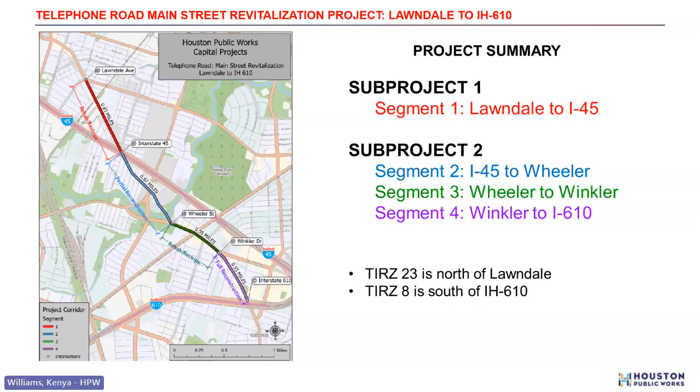Like Kenya said, this project actually has 4 segments. Today we are going to be focusing on segment 1, which goes from Lawndale to I-45. You'll hear about this as Subproject 1, and that's what we're going to talk about tonight. There's another presentation and opportunity for you all to see what Subproject 2 is all about, which is segments 2, 3, and 4. But Subproject 1...

Just to quickly cross-check on where we are, this project goes from Lawndale to I-45, and we do have a railroad crossing within the study limits south of Lombardy. We also have a very important stakeholder. Everybody's important, but we also have a school, which is a combination of elementary, middle, and high school, a private school, just south of the railroad crossing. We will talk about some operations at Gate 2 in the presentation in a few minutes.

The south segment is at the I-45 frontage road, and that particular intersection is owned by TxDOT. We're coordinating with them on whatever improvements need to happen at that intersection.

As you all know, when we get into a project, we like to get an assessment of the base conditions. For this segment, we know it carries 10,000 AADT, average annual daily traffic for both directions combined. We did notice some high speed happening on this section of roadway. Remember, not every single element is going to be addressed, but we've done everything we can to make this a better, safer, and enhanced mobility project.

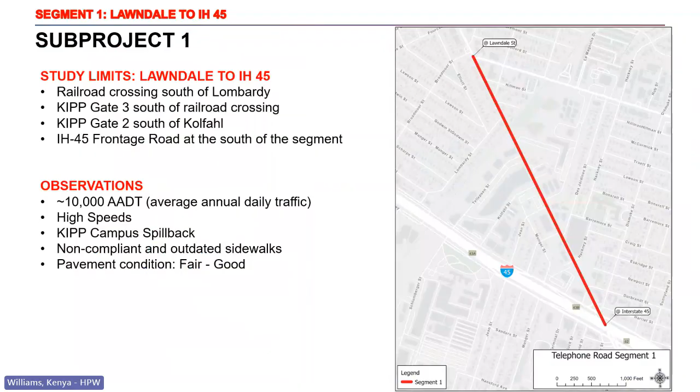In terms of the overall benefits for the project, when we're said and done, you'll have improved sidewalks, upgraded pedestrian crossings at key locations, optimized traffic signals, optimized bus stop locations, and smooth roadway transitions with clear signage at the railroad crossing. On top of that, we've done an effective evaluation to understand what drainage mitigation improvements need to be completed for this segment.

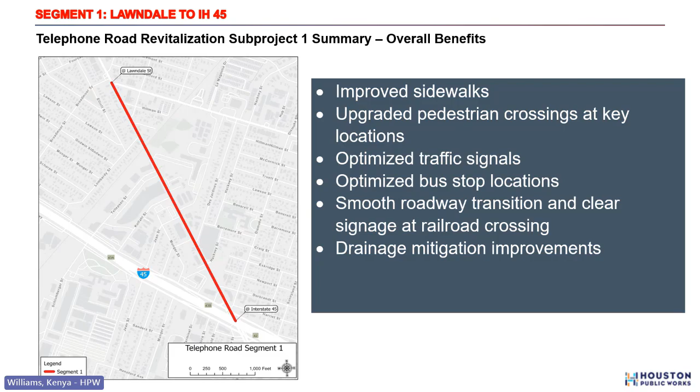As part of the field investigation, most of you know what's out there today.

From a pavement perspective, we observed some cracked pavements and cracked curbs and gutters. From a sidewalk perspective, we saw curb ramp damages, cracked lane sections, and cracked sidewalks. Looking at drainage issues, there were some depressed sidewalk panels and ponding issues. That's why we're here today, to make an honest, effective effort to fix most, if not all, of these challenges for y'all.

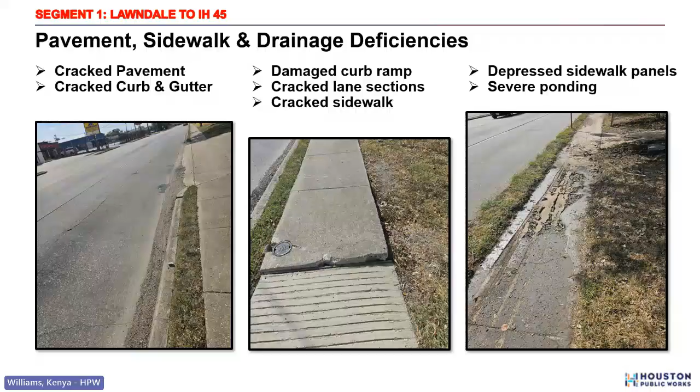We did identify for this section of roadway that we look at the latest 5 years worth of crash data, vetted and approved by TxDOT and City of Houston. According to that, we observed 71 crashes within the limits of segment 1. Unfortunately there was one fatal crash, and we also had some suspected serious injuries and possible injury crashes in the segment.

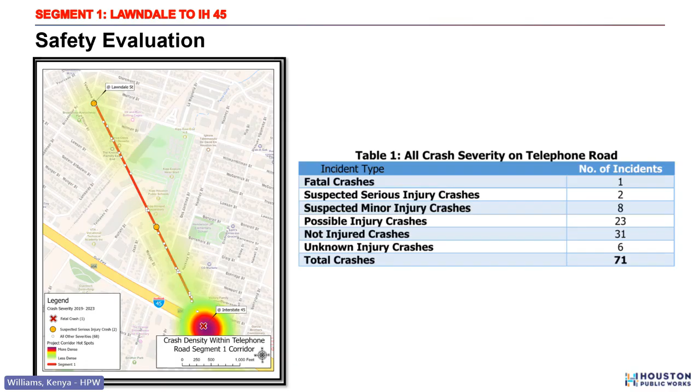The big blob you see at I-45 relates to the volume carried at the frontage road, and typically as exposure goes up, your crash rate goes up as well. That's why you see higher density there than the rest of the corridor at the I-45 interchange.

To quickly give you a highlight and breakout of what's entailed in this project, we'll walk through several different elements of improvements we're going to be doing for you, starting with the roadway improvements.

As part of this project and design, we're going to do pavement rehab and restriping throughout the corridor, which will improve ride quality and extend pavement life. We're also going to do localized concrete panel replacements where needed, and for sections where panels are good enough, we'll be doing crack sealing as well. When all is said and done, all pavement markings will have been updated and refreshed.

Bringing them all up to the current standards. We're also going to maintain the same number of general mobility lanes that are out there today. We will talk about how that's going to look like in the proposed improvements in a second. We're also going to improve surface condition, upgrade signage, and address the railroad crossing with enhanced safety and visibility, plus some minor intersection safety improvements.

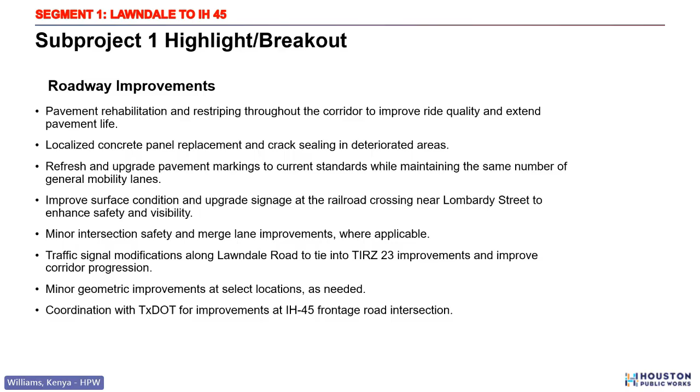The Lawndale Road signal is pretty much the only signal within the city jurisdiction that's going to be part of this segment. The majority of improvements on that signal will be handled by what we call a TIRZ 23 improvement project, which is part of the overall progression on the north and south side of this project's limits. We'll also be doing minor geometric improvements, and most importantly, at the I-45 frontage road intersection, we'll be coordinating with TxDOT for any improvements needed.

In terms of pedestrian facility improvements, this is the most exciting slide in my opinion, because we're going to give you significantly enhanced pedestrian facilities, reconstructing sidewalks to 5 feet where possible. In front of the KIPP school, we're actually extending it to about 7 feet. We're also going to be doing new curb ramps and detectable warning surfaces at intersections.

We're also going to be enhancing the mid-block crossing at KIPP Gate 2 — we'll talk about the details in a second. Every single crosswalk you touch is going to be a high visibility crosswalk with better treatments to enhance pedestrian safety. And of course, we're also going to be doing pedestrian safety and connectivity improvements at the railroad crossing. We've been having ongoing discussions with Union Pacific on that.

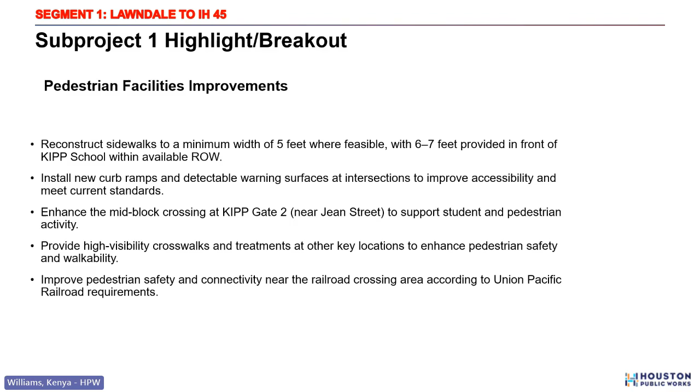Next slide, please. And we've also been coordinating with Metro. Go to the next slide, Kenya.

We also did an evaluation on the illumination for this segment. Right now there are no cold spots, as we call them. So for any existing lighting components, in order to maintain enhanced illumination levels for your safety, we're going to be doing in-kind replacement of the existing lighting.

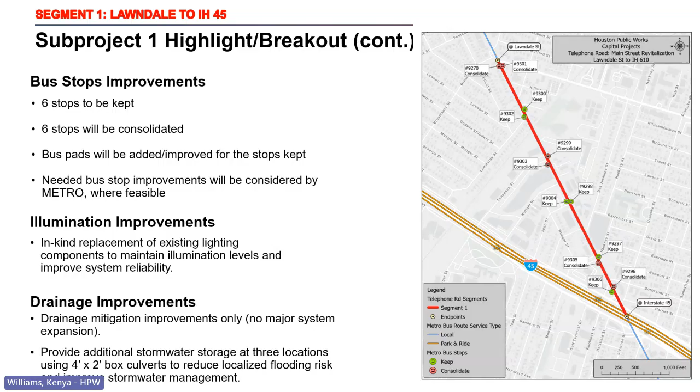Like I said earlier, we've done an extensive drainage study for this segment to understand what we need to do. Good news — we don't have to do any major system expansion. However, we did identify 3 locations where we have to install box culverts. We're going to be doing 4x2 box culverts at those 3 locations, which will reduce some localized flooding we talked about earlier and improve stormwater management for you guys.

All right, I'm going to quickly walk you through how this is going to look when the project is all done, just to give you a visual representation. So when all said and done, the general mobility lanes are going to be maintained, and a mid-block crossing is under evaluation at McCormick Street. The city is reviewing to see if we can install a new one — if we do, we will.

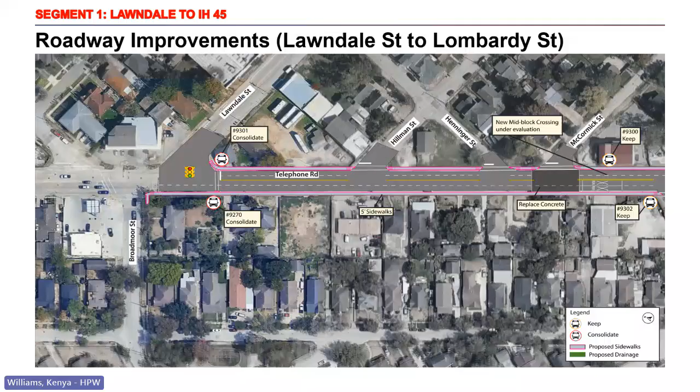Like I said, we're going to be replacing concrete panels where we have to. And you'll see that some bus stops that need to be consolidated will be consolidated, and the ones we're going to keep will be improved. Next slide, please. And as you go past the railroad crossing, like I said earlier, we're working extensively with Union Pacific.

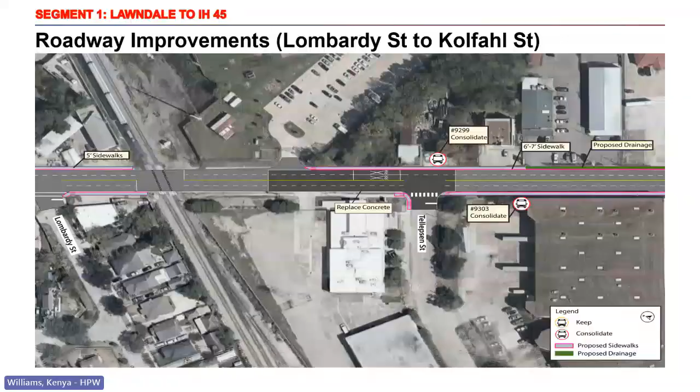Our goal is to maintain connectivity across the crossing as well, while maintaining safety and visibility. There are two different options that we're evaluating right now, and we will implement what is effective for you guys for better connectivity through the crossing with UP's blessing and recommendations.

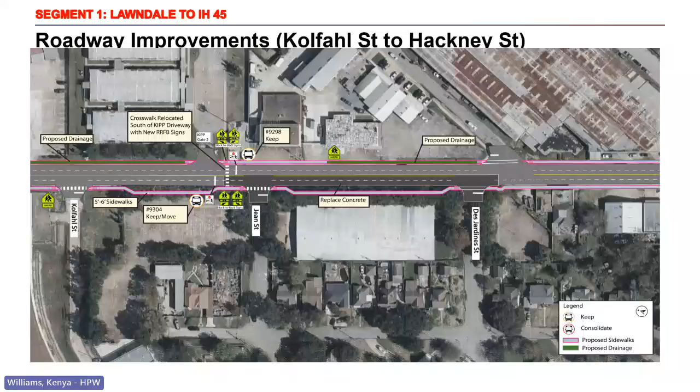And like I said, we're also going to be doing this enhanced crossing at the KIPP gate to accommodate the parents, teachers and staff. That's going to be improved and enhanced with the latest guidelines approved by the City of Houston for better pedestrian access, improved mobility, and visibility.

The same thing is going to happen if you move on. I think that was just a close-up shot of the same location we're talking about. The crosswalk is going to be relocated, south of the KIPP driveway.

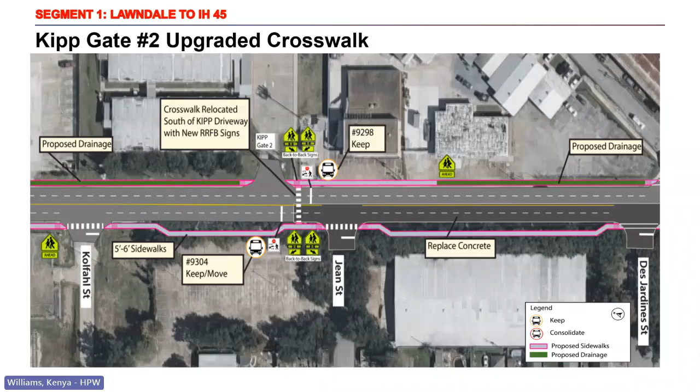We're going to do what we call rapid flashing beacons. So when a pedestrian wants to cross, they have the opportunity, and motorists will see that there is a pedestrian trying to cross. That's going to be significantly improved than what's out there today.

When we get closer to the 45 frontage road, we're just going to continue on and tie into the frontage road intersection. The additional improvements on this project will be picked up just south of 45 in segment 2.

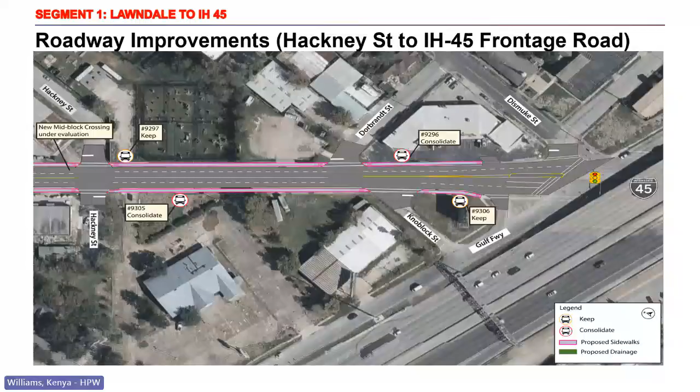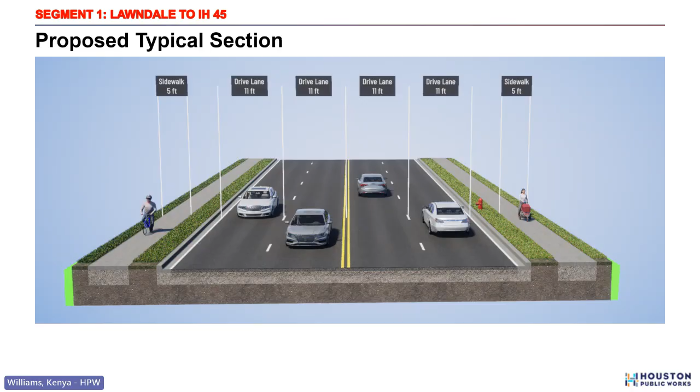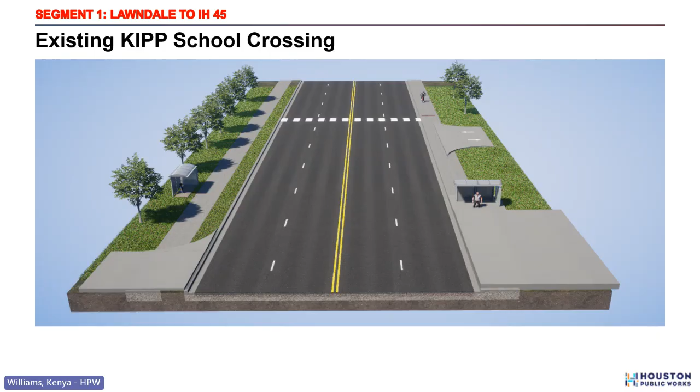But if you go to the proposed improvement we're making, it's going to be a substantially enhanced sidewalk, with ADA ramps, the connections, the RRFB, advanced warning signs telling motorists where to stop, and the bus stop adjustments to make sure pedestrians have good access to the bus stop as well.

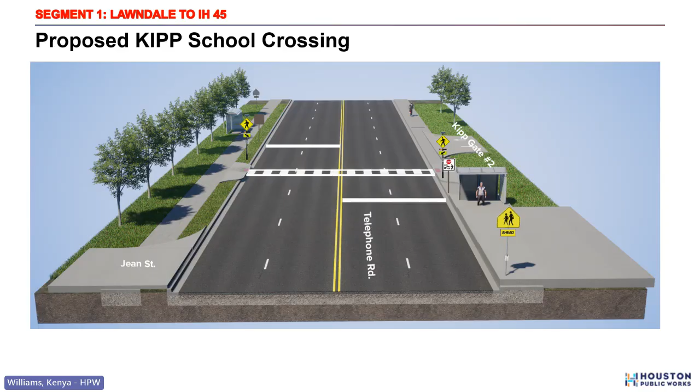Okay. All right, I guess at this point in time, do I turn it back to you, Kenya, for next steps? Yes, or Anna Clifton maybe? Okay, yes. Thank you, Raj, for those exciting design updates.

And those sidewalks, you said six, seven? I think the kids would like that. Yes ma'am, I just did it for them. Just did it for them. But in reality, it's going to be 7-foot sidewalks.

Yes, okay thank you. So as we said earlier, we anticipate construction to start this year in the fall. Fall is October, November, December. And it should take a year, so we should be complete by fall of 2027.

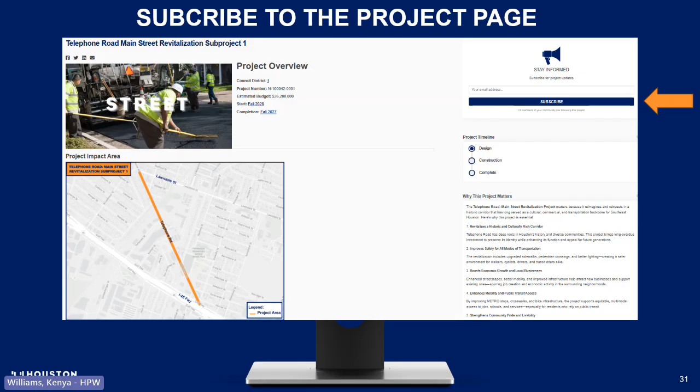Welcome to EngageHouston.org, your go-to hub for staying informed and involved in Houston's infrastructure projects.

Under You're Invited, you'll find upcoming virtual community meetings. When it's time to join, just click the link, and it goes live automatically. Click on any project page to explore details like budgets, timelines, maps, and why each project matters.

Scroll down for construction updates, downloadable plans, and more insights about what's happening in your community. And here's one of our most powerful tools, the interactive map. Simply enter your address to see projects happening in or near your neighborhood. It's an easy way to stay connected to improvements right where you live.

Have questions? Visit the FAQ page or use the Engage Us tab to get in touch with our team directly. Use the top menu to explore projects across the city, or type a project name right into the search bar to find what you need fast.

Want full access? Click Register, create a username, set your password, answer a few quick questions, confirm your email, and you're in. Welcome to EngageHouston.org, Houston's award-winning platform where transparency meets progress, and your voice helps shape the city's future.